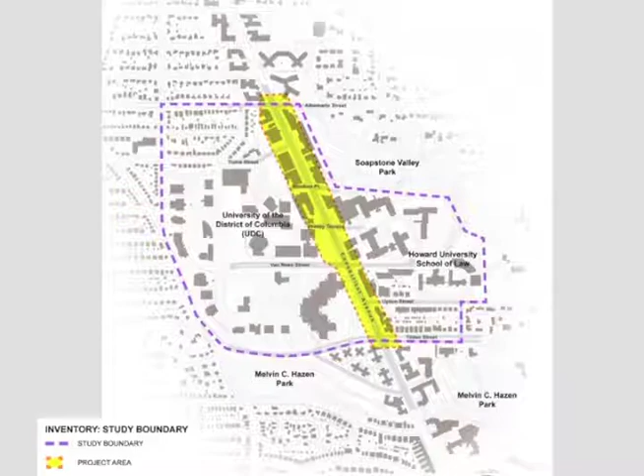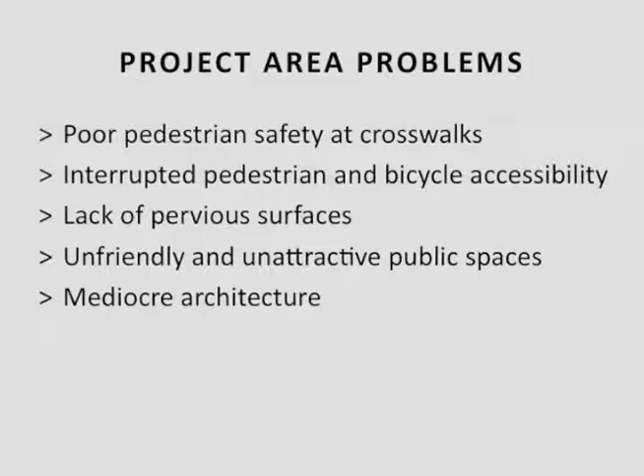So we had the study area, and there were the typical problems. The community was really upset about the grim nature of the UDC metro area. There were problems with accessibility, enormous impervious areas, unfriendly and unattractive public spaces. A great deal of energy in the area, but tremendously lacking in major amenities. People in the community spoke about the mediocre architecture in the public realm. So the next things I'll show you are the process we went through.

We did a very detailed inventory and analysis, and showed all of our work over the course of the 6 months in 4 major public outreach sessions, plus brought UDC students into our firm to go through the urban design and landscape architecture process.

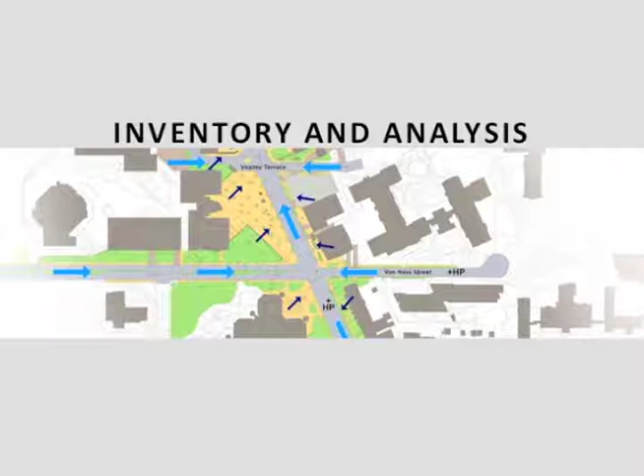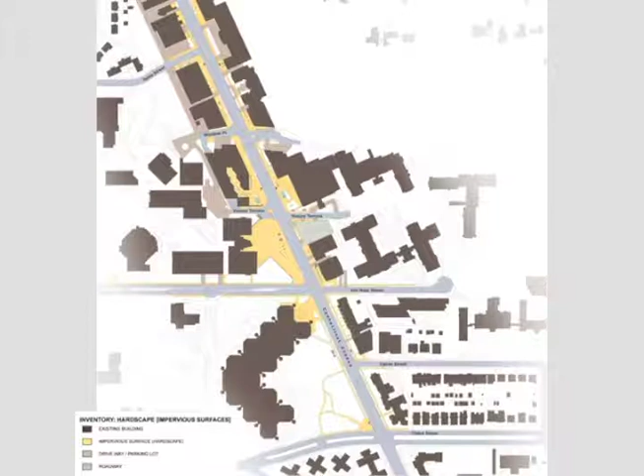So we did the typical inventory and analysis and revealed things that were not really clear to the public—that there are great areas of impervious surfaces, and lots of opportunities using LID to upgrade the various physical and urban design characteristics of the study area.

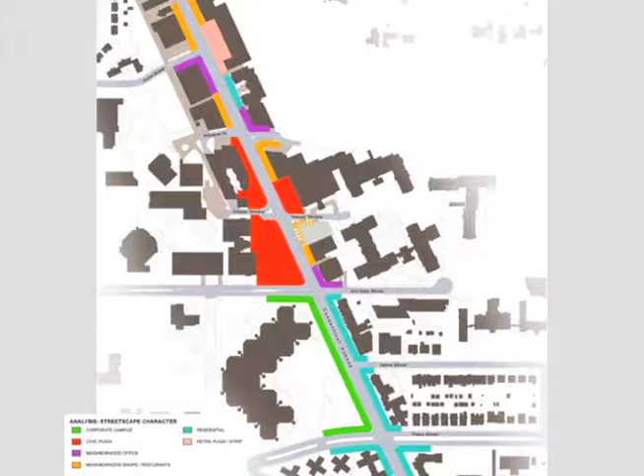We used the project as an educational opportunity, working with the students, the community, and DCOP. DCOP had a fantastic project manager, Andrea Lamaro, who we worked closely with, along with Sarah. We showed, for example, the physical characteristics and identified a number of opportunities.

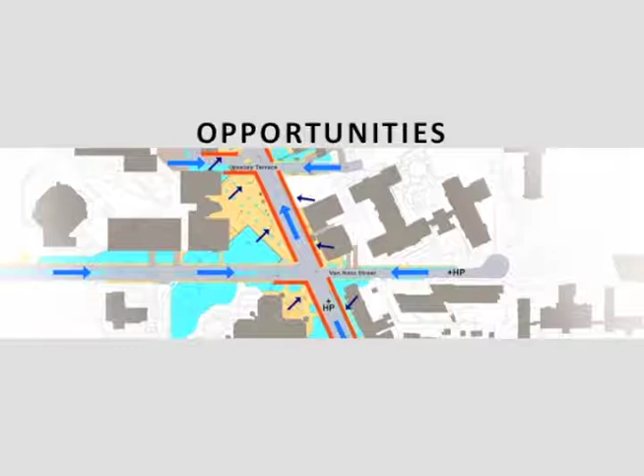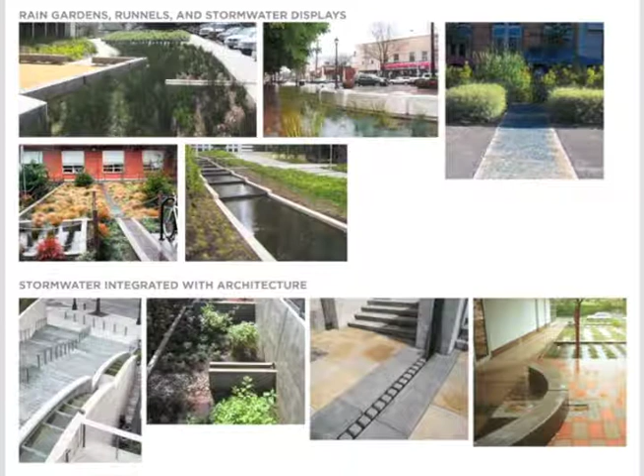The keys for the LID were topography and hydrology, and we did quite simple diagrams to express and explain the problems and then the opportunities where low-impact development could be achieved. We used a lot of precedents from elsewhere in the country as well as in DC to show the creative possibilities that could bring major benefits to the UDC Van Ness metro area.

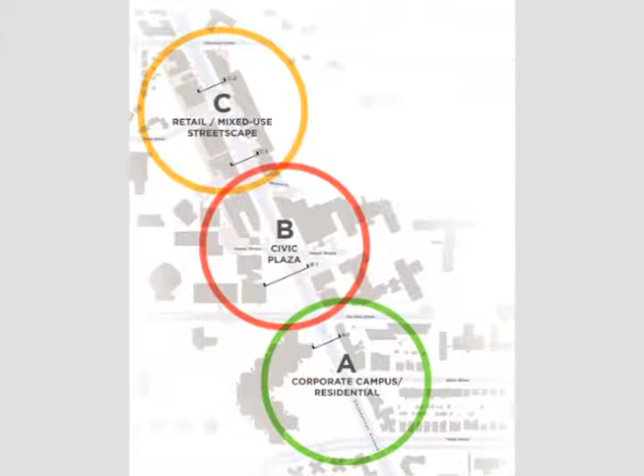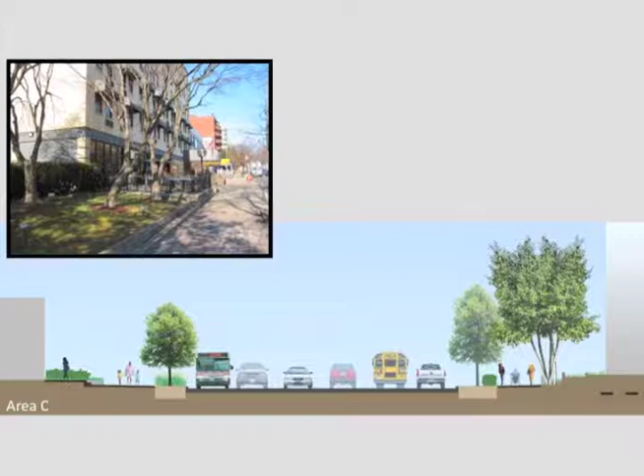We defined 3 specific urban design character zones that began to inform our recommendations. We did cross-sections used as a basis for determining the problems and how they could be solved, always paired with existing conditions photographs to show the ways in which things could be changed.

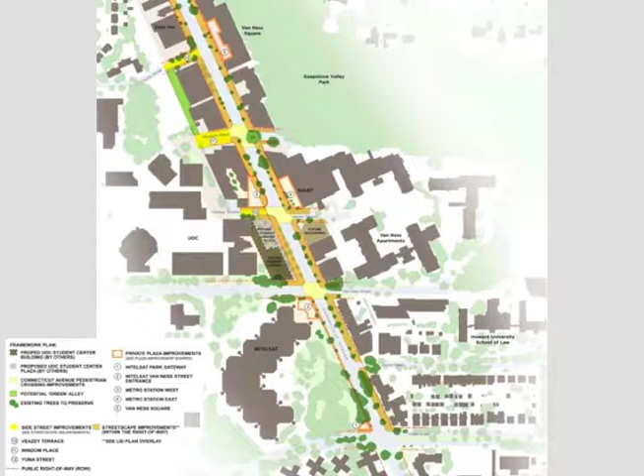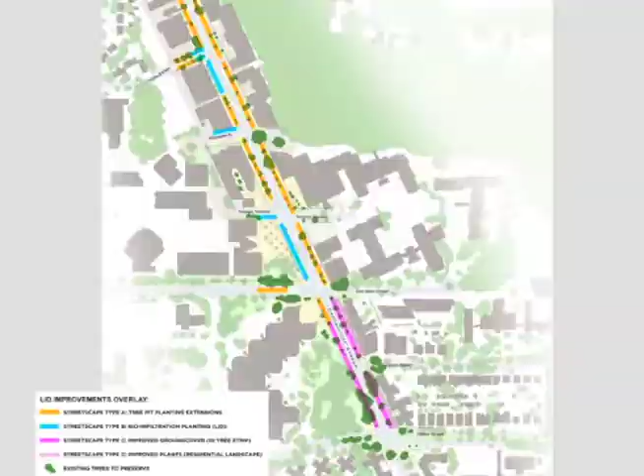We had a lot of interactive sessions with the public, and all of our recommendations were based on what we learned from those sessions—everything built on everything else. So our recommendations were thorough and creative. They identified ways LID could be incorporated into the public realm, and specifically those types of conditions achievable through elements I'm going to show you here.

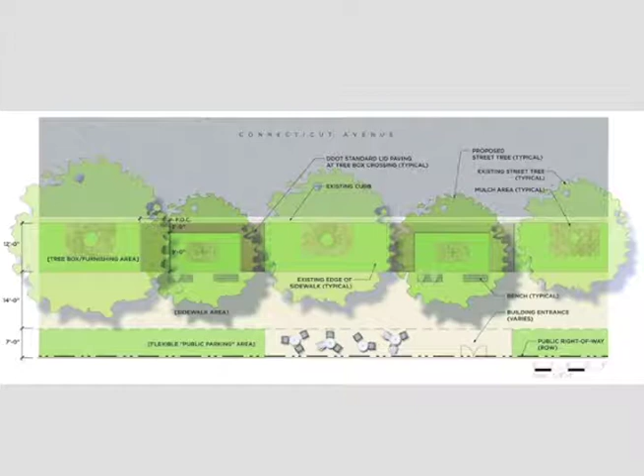This is grim. This is much better. These simple graphics—a simplified, stylized series of simulations—were developed very quickly so we could portray the kinds of opportunities possible in the study area. We showed simple plans expressing how to change a very poorly designed tree box area into something dynamic and attractive that benefits the overall study area.

This is another view looking north from UDC. This shows a way in which stormwater could be captured, street trees planted, and paving developed, all incorporated into an overall scheme that would benefit the area.

We were specifically not charged to look at the buildings, and specifically not charged to look at urban design—that was a completely different study. So it made the $30,000 grant achievable from my perspective, being billable, and helped really get things through.

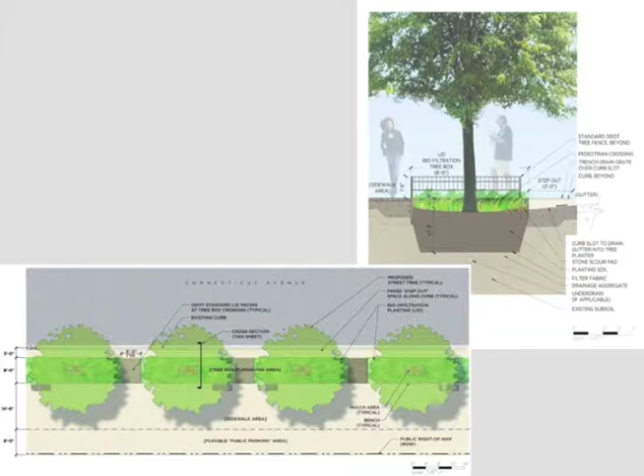In summary, one of the things we really like about TLC grants, and we've worked on several, is that the projects tend to jumpstart other things and tend to be very educational. From a consultant's point of view, in the beginning you help people understand the opportunities possible in a given study area, and there's a lot of interest and excitement that builds and generates other grant opportunities. So thank you.